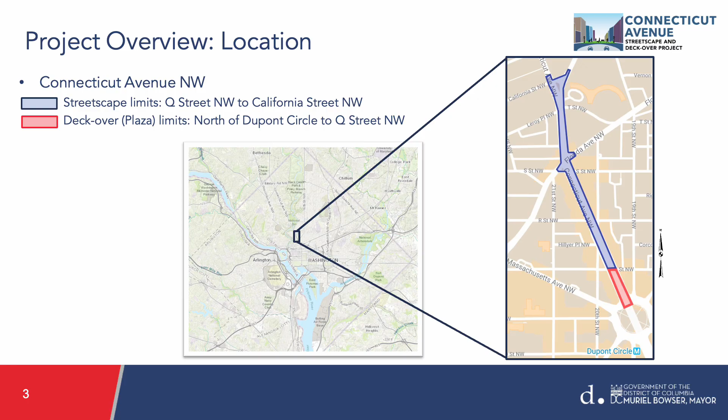There are two components to the project, the streetscape work and the Deckover work. The two components are the streetscape improvements and the installation of a new deck that will create new public space over the existing exposed roadway that continues beneath Dupont Circle.

The goals of the streetscape improvements are to support safe and effective multimodal access to pedestrians, automobiles, bicyclists, and transit. The contractor will work to upgrade sidewalks, streetlights, landscape, drainage, and traffic signals, and will provide a new protected bike facility. The Deckover Plaza will create a new public space for the community for strolling, relaxing, working, and other future programming.

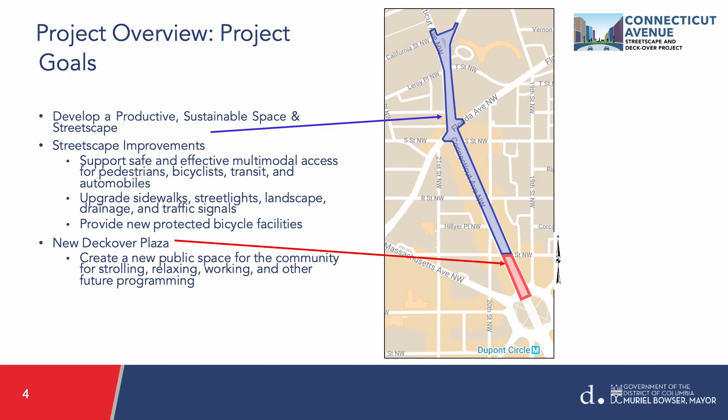Now let's take a look at the project scope. First, we're going to review the streetscape improvements, which are the improvements that are going to occur between Q Street to California Street along this corridor in Northwest DC.

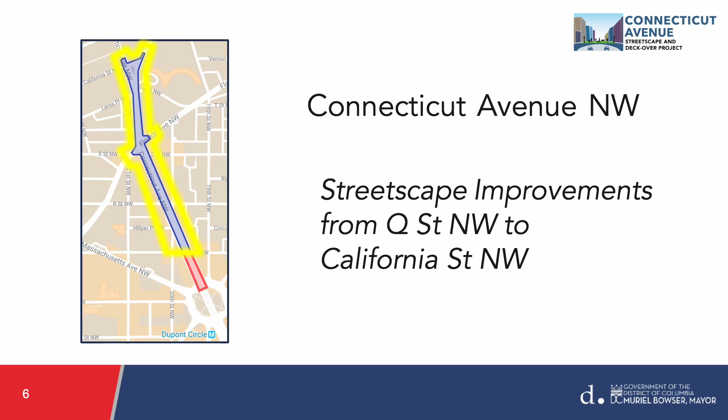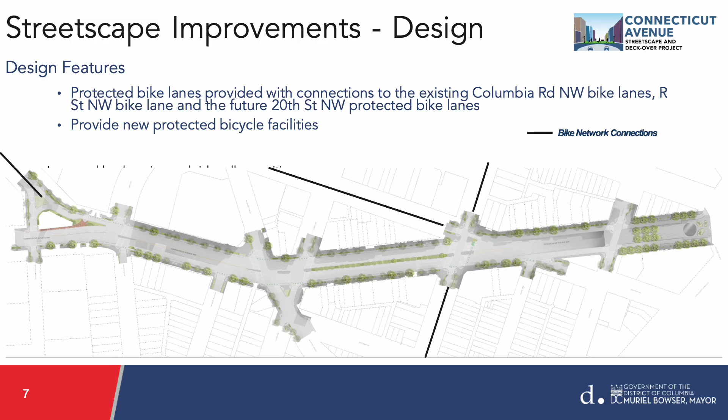One of the design features of the streetscape will be the build out of protected bike lanes to connect the bike facilities network in the city to Columbia Road, R Street, and future 20th Street bike facilities.

Additional features will include the upgrading of the sidewalks with pressed concrete pavers, new curb and gutter and ADA ramps, traffic median islands, and the new protected bike lanes mentioned earlier, streetlights and traffic signals upgrade, drainage upgrades including new storm drainage facilities, bioretention planters, and permeable pavers for storm management, improved landscaping with trees and tree pits with structural soil, street furniture that will include benches and multi-space parking meters, and updating infrastructure and utilities as well.

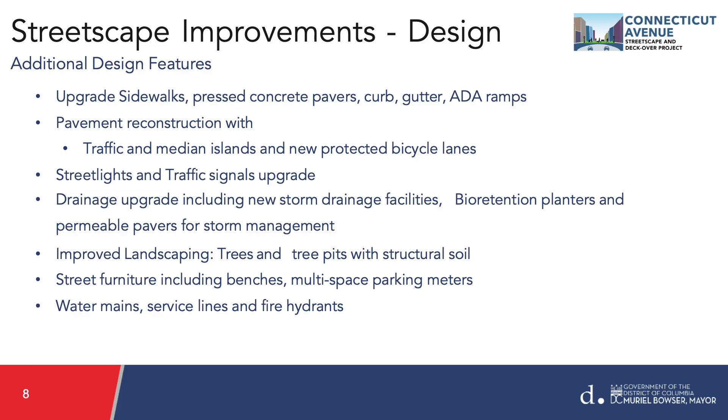Here you can see a sample of the layout of these new streetscape improvements. This slide represents the block along Connecticut Avenue from T Street to Florida Avenue. You can pause the presentation here if you wish to take a moment.

Using the legend provided, you can see where new teardrop streetlights will be installed, both single and twin luminaire, new traffic signals, and more aesthetic features, including benches, bioretention planters, and new planting areas, as well as safety improvements with upgraded crosswalks and conflict markings, which are markings that alert a pedestrian, cyclist, or driver to potential conflicts with other modes.

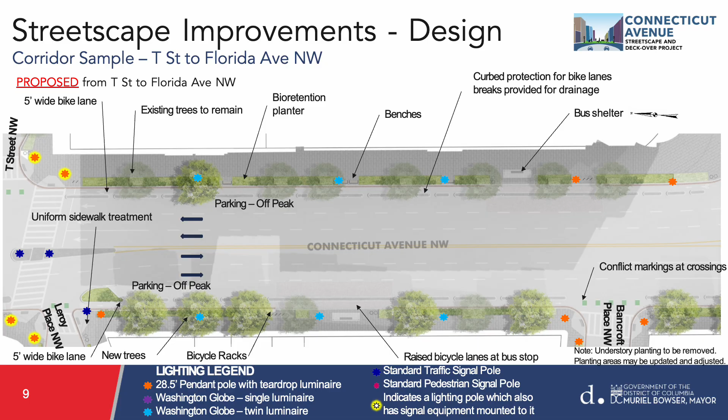This slide shows how the lanes look across Connecticut Avenue. Starting from left to right, there will be the sidewalk, then a planted area where you will have trees and other greening, then the protected cycle facility, a curb to separate the bikes from the vehicles, then the northbound and southbound travel lanes, and then a mirror image on the other side: first the protection curb, then the cycle track, the planted area, and then the sidewalk.

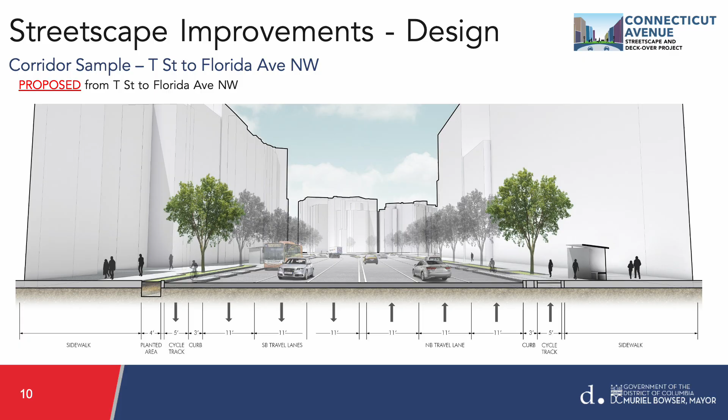Now let's take a look at the Deckover Plaza, which is nestled in the area just north of Dupont Circle up to Q Street. The Deckover project will require multiple stakeholder and utility coordination.

During construction, pedestrian access will be maintained to the many retail shops and restaurants that line both sides of the street. The existing service travel lanes will be closed to traffic. Detours will be put in place and DDOT will ensure advance notification of any maintenance of traffic changes.

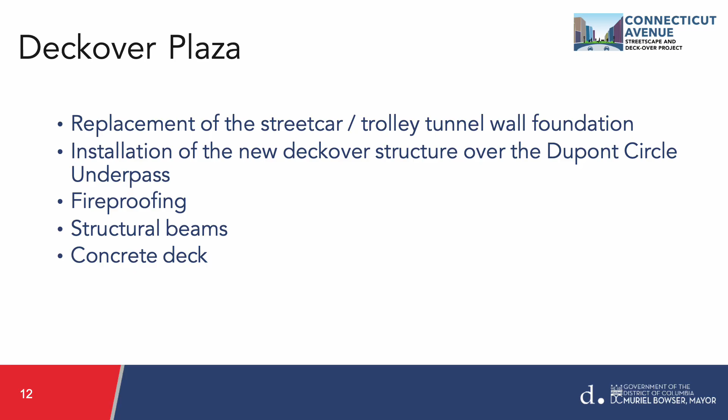In order to build the deck over the existing underpass lanes, the contractor will build a trolley tunnel wall foundation and then install a new deck structure over the underpass.

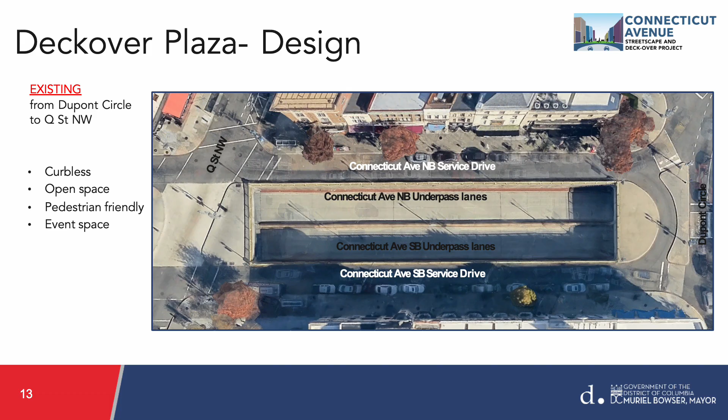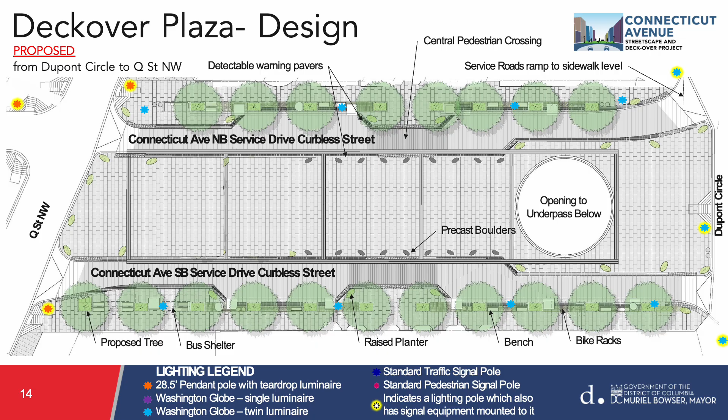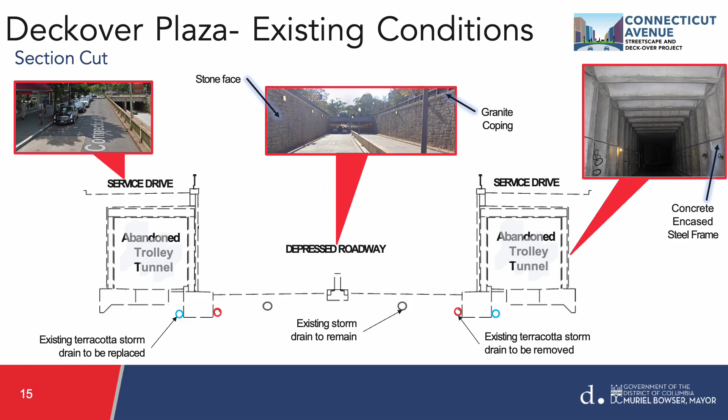Here you can see the existing conditions of what the area looks like today. Within the large sidewalls are the trolley tunnels with their utility infrastructure. While the trolleys no longer run, a large portion of the area on the east side of the circle is now home to Dupont Underground, a thriving art exhibit space.

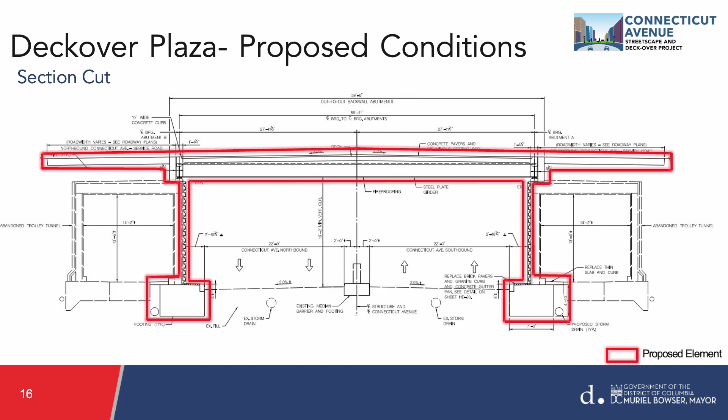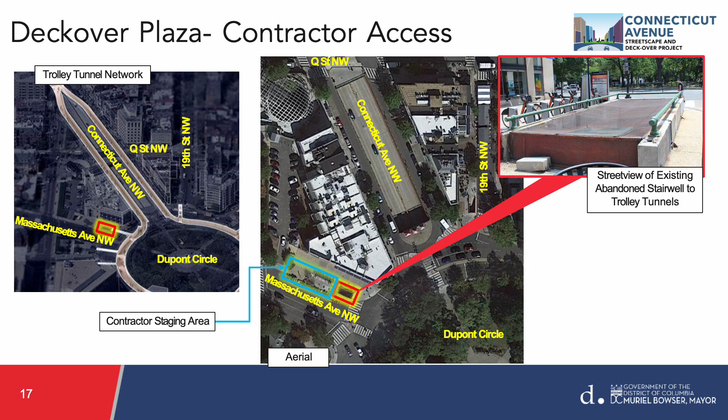The outline here in red shows where the new infrastructure will be built to support the new Deckover. The contractor will need some public space to stage for the ongoing construction. During the design phase, it was determined and agreed by all that the best location would be along the area on Massachusetts Avenue. You can see the location in the teal-colored rectangle on this slide. This also shows the area where the contractor may access the existing trolley tunnels.

Next, we will go over construction sequencing. As this is a construction project, all dates and times are subject to weather, so we encourage people to go to the project website for the latest updates once construction is underway. The project website and email are provided at the end of this presentation.

The contract was awarded to the contractor in February of 2025, but this does not mean construction will start right away. There is a lot of coordination, submittals, schedules, and many other parts of preparing for construction that must take place first. Actual construction is not expected to begin until later in the summer.

Once construction does begin, construction crews are allowed to work on the streetscape work that is not behind the barriers, within the street itself, between the hours of 9:30 a.m. and 3:30 p.m. Any work that's done behind the barriers, such as sidewalk work behind Jersey barriers or the deckover work below ground, the contractor is allowed to work from 7 a.m. to 7 p.m. The contractor may also need to work nighttime hours, but that will require prior approval from DDOT. Any changes will be communicated to the community via email and on the project website.

Construction for the entire project is anticipated to take approximately 24 months. The streetscape work will be done in sections to minimize impacts to businesses and to allow consistent travel lanes to be open. The deckover work will be continuous.

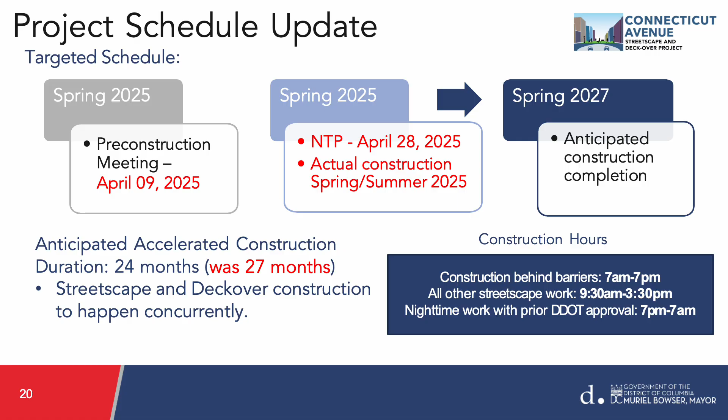Each phase will be completed before the next phase is started. All 7 blocks will not be worked on all at once, just sections at a time. And again, traffic will be maintained a minimum of 1 lane in the area where the sidewalk is being constructed.

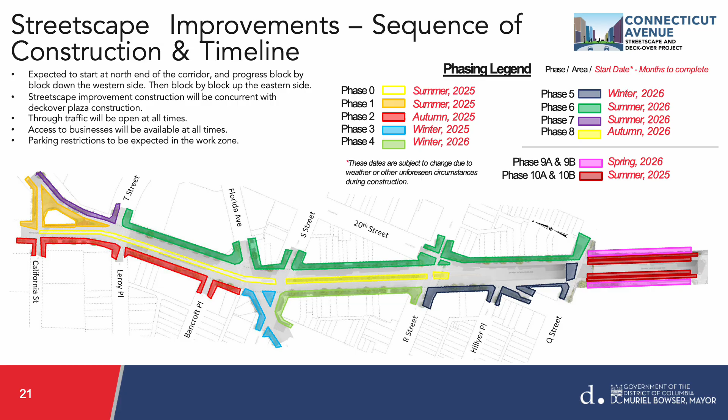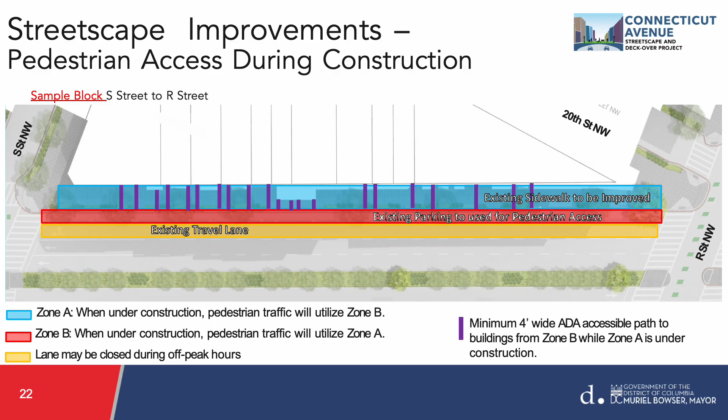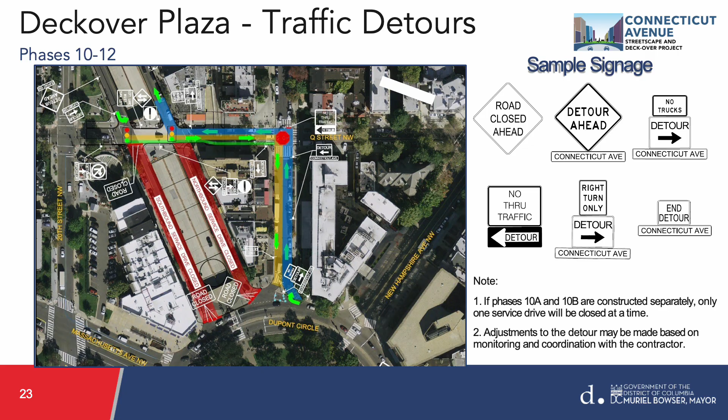As with all infrastructure projects, oftentimes there is a need to detour traffic. The streetscape portion between Q and California will not require detours, as there will be a minimum of 1 lane of traffic at all times. However, for the Deckover project, the service lanes will be closed, and as such, a detour will be necessary. Q Street between Connecticut Avenue and 19th Street, and 19th Street from Q Street to the Circle, will be designated two-way to allow traffic to and from the Circle. Clear signage will be installed to guide traffic through the detour during the project.

These next slides illustrate where work will be taking place during various phases of the deckover, as crews will move from one side of the street to the other and then to the underpass roadway. More importantly, they show what will be open to pedestrians, to the retail and restaurants in this block, and how people will be able to continue to access them through all phases of the project.

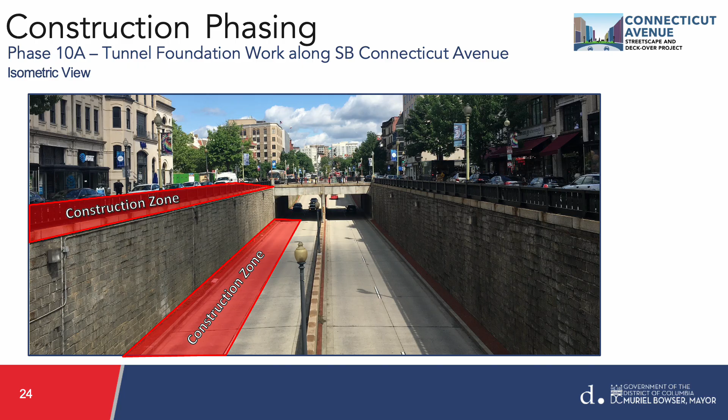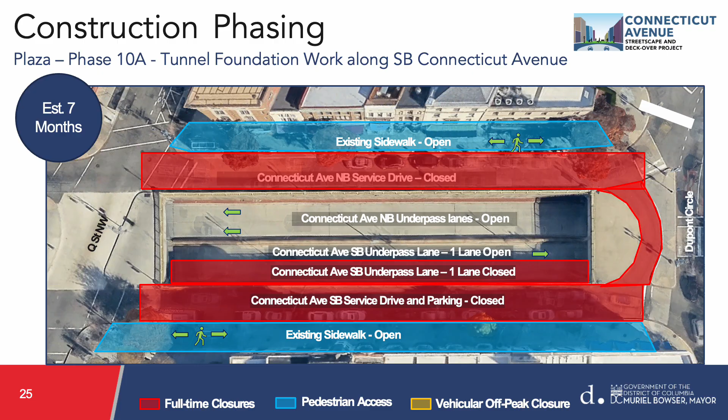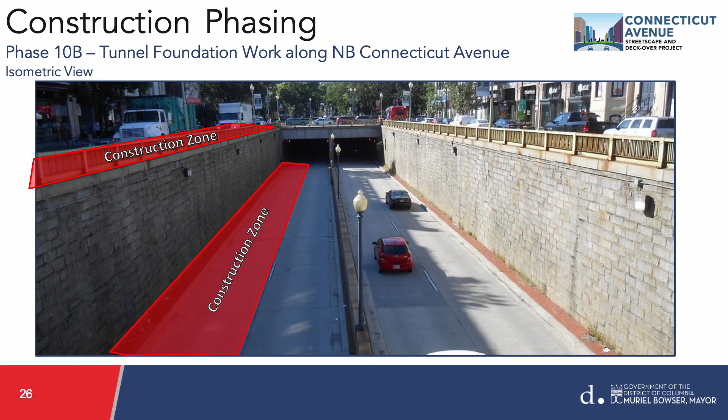Here you can see in the blue section, this is phase 10A. In the blue section, you see where the existing sidewalk continues to be open while they work in the street. Here in phase 10B, you see where tunnel foundation work is happening. Again, above the ground, as we just showed you, the service lanes are closed, but the sidewalks are accessible. And here you see that from an overview as well. Existing sidewalks are open while the crews work in the other lanes.

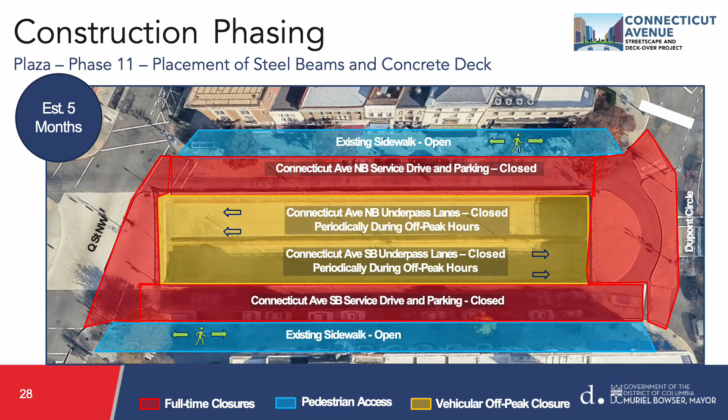During the final two phases, the underpass lanes will be periodically and temporarily closed as the crews install the Deckover Plaza. And you can see that again here.

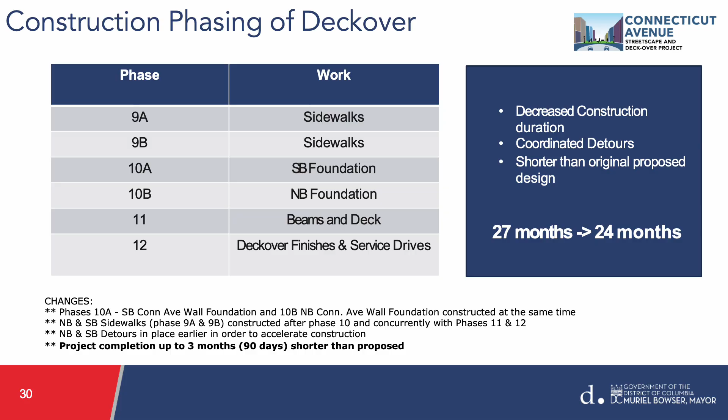The order of the Deckover phases is here on this slide. First, the crews will work on the sidewalks, then the foundation work, the beams and the deck are installed, and then final finishes above ground.

DDOT is focused on public engagement during the project to ensure people are notified of any changes, and more importantly, that they're aware of updates and milestones as the project team works through the Connecticut Avenue Streetscape and Deckover project. There is a project website and project email. Please check the website for more information as the project progresses. The website is connave-streetscape.ddot.dc.gov. The project email is conab.deckover@dc.gov and is monitored frequently.

There were also yard signs put up along Connecticut Avenue. Those will be swapped in and out as the project progresses, providing a QR code and reminding people that the project is ongoing. The QR code will take you to the project website. There's a project office on site. We will continue business and residential outreach. There'll be regular project updates via email, as well as updates provided at the ANC meetings, and any information about traffic detours and other advisories will be sent out in advance so people can prepare for any changes to the traffic flow or other necessary information.

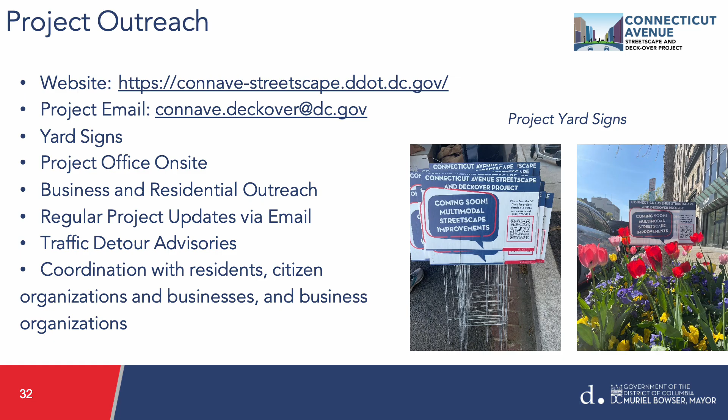Once again, here is the project contact information and the website. Feel free to scan the QR code, which will take you directly to the website. This concludes this presentation. Thank you.